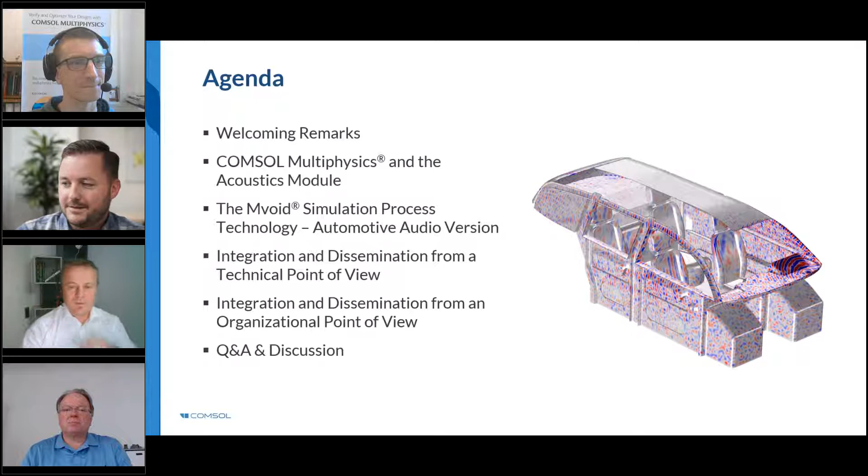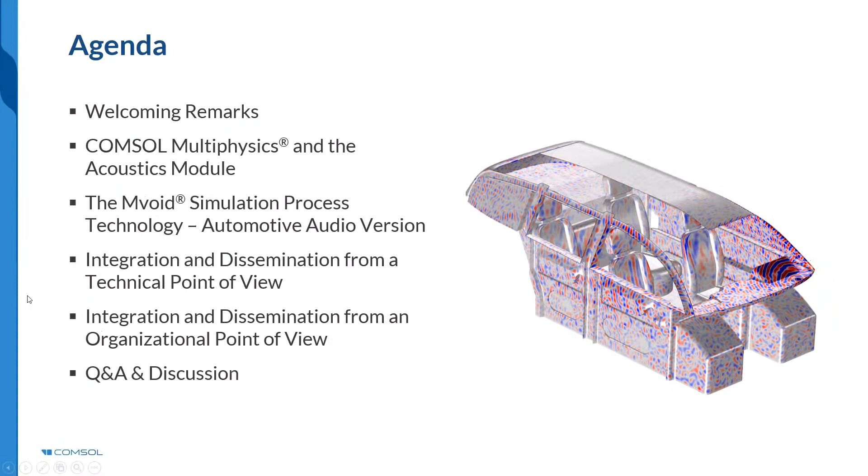All right, having said all that, I will turn off my webcam now. Mads, you should be able to switch the slides now. Let's see. Perfect. Yes, it works. Thank you, Philipp.

I will give just a really quick and brief introduction to the acoustics capabilities in Comsol Multiphysics, with a few slides, and then I will leave most of the time for Alfred and Michael. So I have this single slide about the Acoustics Module, and I like to think of our acoustics products as being multi-purpose, multiphysics, and multi-method. So three times multi.

By multi-purpose, I mean that we have the technologies and the physics, we call them, to model all types of acoustics. So we are not only modeling acoustics inside of a car solving the Helmholtz equation, for example, but we also have formulations of the governing acoustic equations when you have a background flow, when you are modeling acoustics in small devices with thermoviscous acoustics, and so on. So a lot of various implementations of the governing equations for acoustics that have more or less detail depending on the situation. And all that is packaged together, and you can couple many of these formulations together also.

Then, in many cases when you're talking about acoustics, it's also multiphysics. And these capabilities are some of the very strong points of COMSOL, obviously. So we have capabilities for modeling vibroacoustic systems, acoustic-structure interaction. We have capabilities for modeling piezoelectric materials.

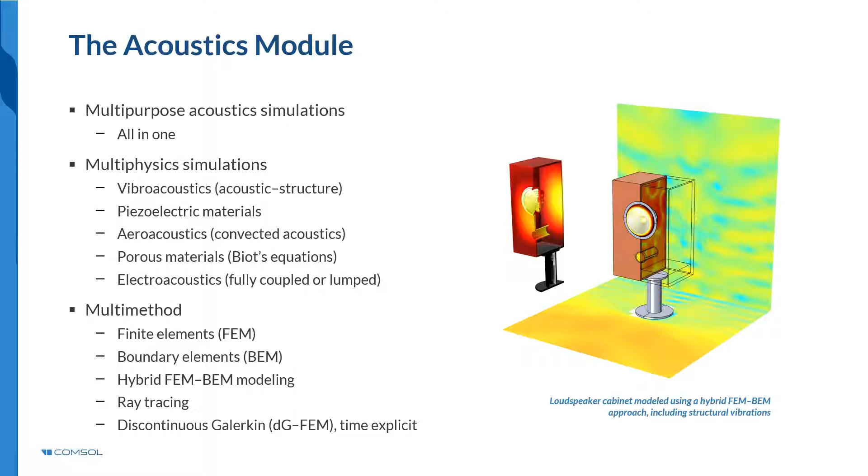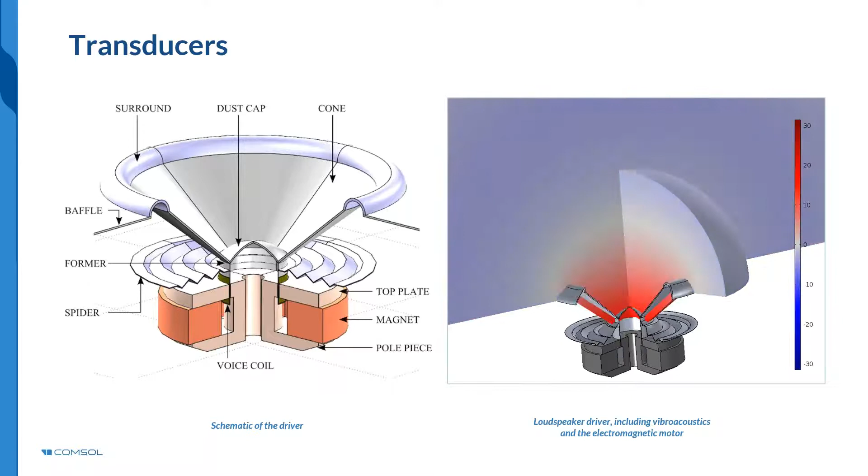Okay, here we go. So I mentioned modeling transducers. Here's one example of a full electrovibroacoustic model of a transducer, a loudspeaker driver, where we are modeling the magnetic system, the pole pieces with some nonlinear iron materials. We have voice coil, cone, dust cap, etc. So that's one thing, when you start looking from the transducer side.

Then, in this case, today we're talking a lot about car cabin audio. How do you want to include your speaker into the cabin of the car as the source? You have two different choices. Let's start at the right, for example. In the lower frequency range, you will typically be doing a full wave method, so could be finite elements.

We can see here we have a mid-range speaker sitting in the door of the cabin. And you can model your cabin in the frequency domain, for example, up to say 2-3 kilohertz. With our latest solvers, you can actually go quite high up in frequency, 5-6 kilohertz, and do the full wave method. But probably for efficiency, you will tend to stop at 3 kilohertz.

In this case, you can model your speaker as a lumped model, or you can integrate the full finite element model of the speaker in the car. You can also model the car door and the coupling between the speaker and the car door. You have volumes inside a car door. You can extend the complexity as much as you want.

Boundaries in the car can be modeled with impedance boundary conditions, or you can model, for example, foams with porous materials. When you move to higher frequencies, you will typically switch to the ray tracing method. In this image, I'm showing a hybrid finite element ray tracing approach where the rays are not released from a point as in classical ray tracing, but from a surface.

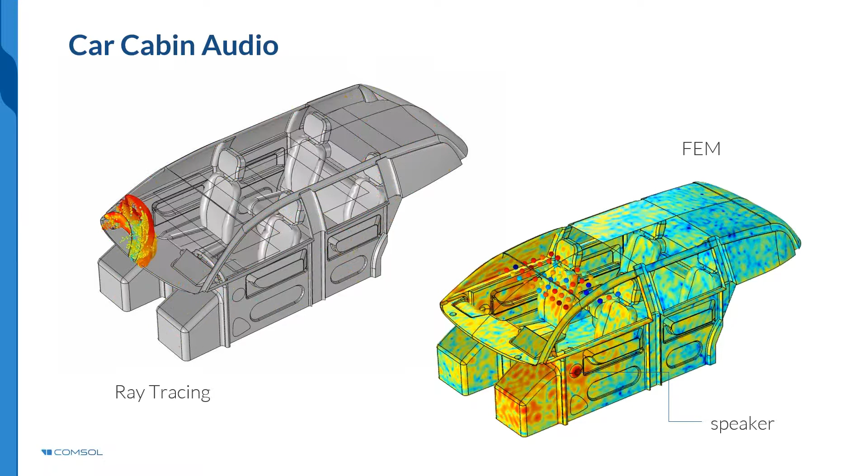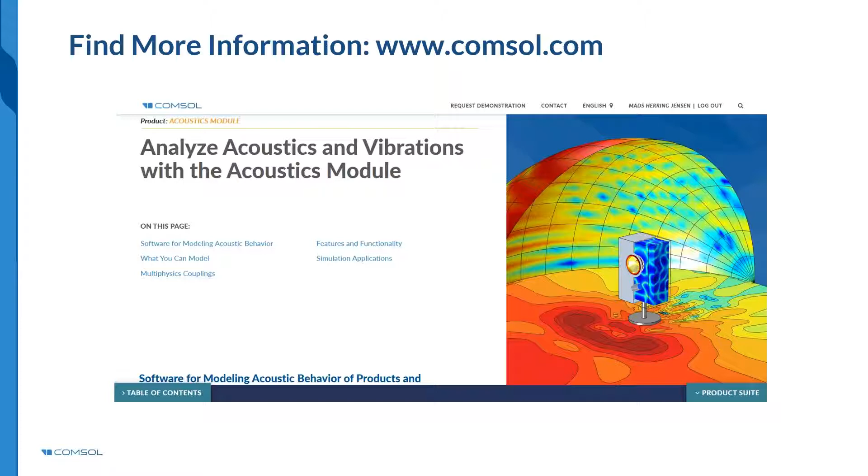So yes, perfect. Good. I would like to lead you through the first part of our presentation, which is structured, as you said already, Philip, in these three topics: the MVOID simulation process technology, talking here about the automotive audio version, and then looking at the integration and the dissemination from a technical point of view, but also from an organizational point of view. So let's start with the MVOID simulation process technology.

Here I would like to start with the use cases and the applications of our customers. Most of them have been already mentioned by you. Beside an outstanding sound experience, considering the entertainment, there are more and more requirements for the automotive audio system in terms of infotainment, talking about a clear car communication. Then the vehicle acoustics from an NVH point of view, simply to improve the ride comfort with ANC, but also, as mentioned, important legal requirements for AVAS, for the warning systems, but also the e-calls.

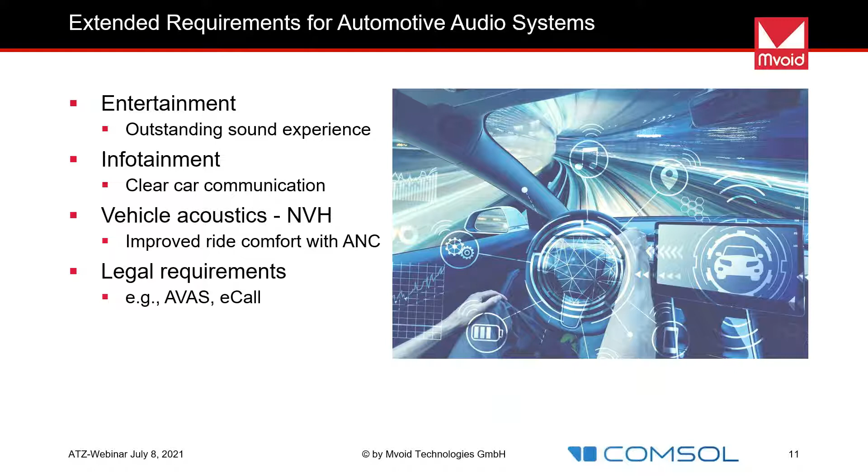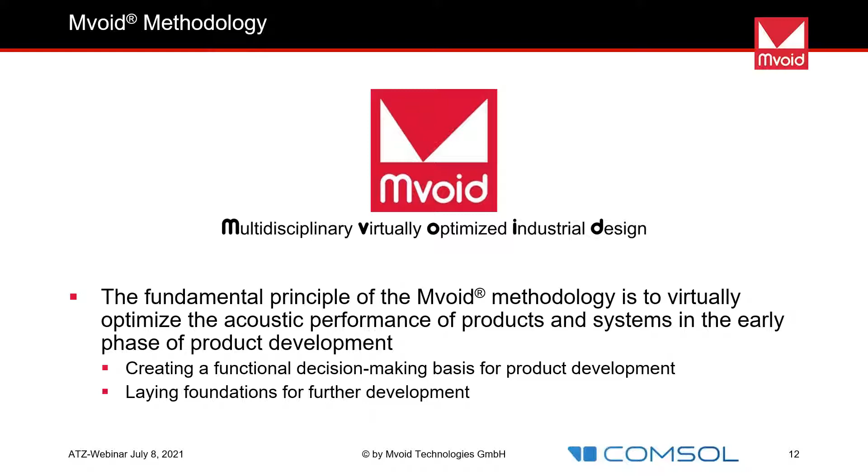So, giving an overview, first of all, what is the MVOID methodology? The fundamental principle of our methodology is to virtually optimize the acoustic performance of products and systems in an early phase of the product development process. So really to create a decision base for product development across the hierarchy at the customer, and to lay the foundations for the further development.

Our simulation environment represents a fully digital development environment for automotive audio systems, but also develops products with acoustical properties in the virtual space by multidisciplinary simulations. Thereby we are integrating engineering disciplines like multiphysical engineering analysis, digital signal processing, sound tuning, psychoacoustics, and the subjective evaluation, which is extremely important, but also binaural audio.

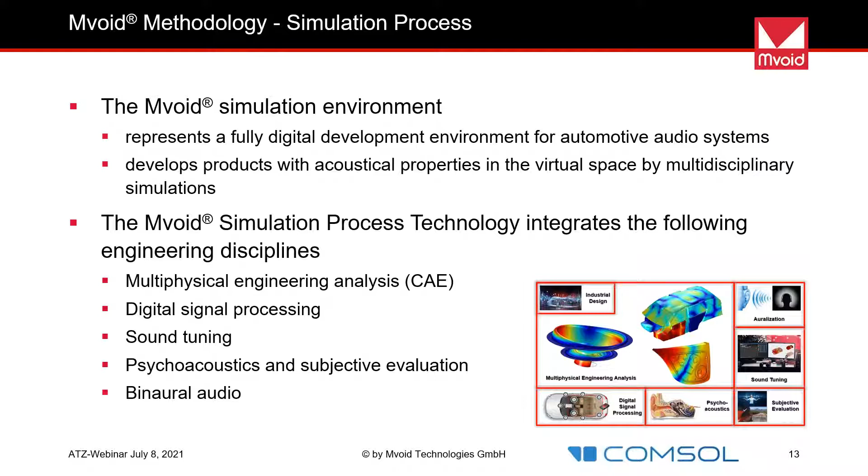On a tier level, in regards to our methodology, we are starting on the component level, talking about the loudspeakers, and ending up on a system level by achieving the digital twin. So starting, as I just said, on a loudspeaker level. Then in the next tier level, we are integrating the enclosure, and then modeling these in the car cabin. This represents the first phase, which is called the virtual prototyping based on a COMSOL model.

After that, we are continuing our methodology with a level 4, the virtual tuning, a level 5, the auralization, and a level 6, the matching between the virtual model, so the digital twin, towards the physical car. And again, this represents the virtual system engineering of our entire process.

So the question is now, how does this fit into the product development process from a customer perspective? Let's assume in this case a really simplified one, because otherwise we could spend hours talking about the product development process and the important milestones. So I tried to simplify this into a concept and pre-development, a design and development, and an SOP. At the beginning, there is a target definition coming from a car line where clear expectations are communicated top down, and the audio engineering team is then defining the architecture based on their experience and assumptions.

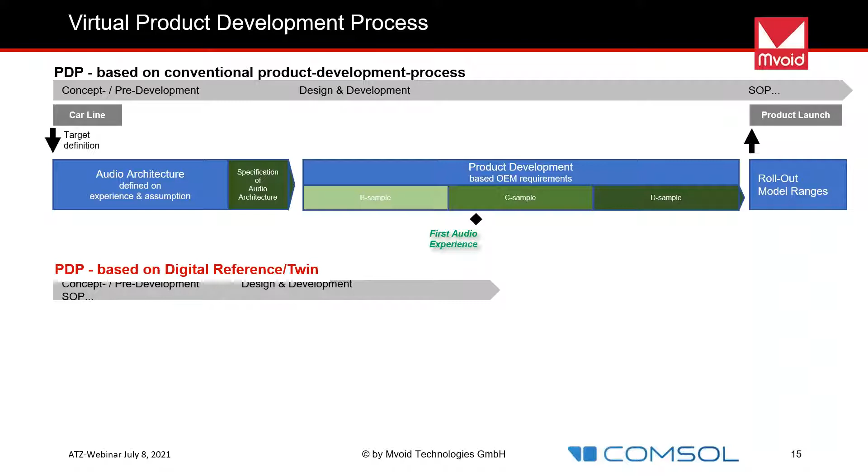Now I would like really to present you the product development process based on the digital reference, the digital twin, again having the same phases. And here we are starting the modeling based on the functional DMU in the early phase, the earlier the better. So within the audio architecture, doing then the virtual tuning, and here creating then the first virtual audio experience, followed by the digital reference. So what does this mean?

And this is for me an extremely important information I would like really to share with you in regards of the time. So here we have the customer feedback that our customer, they need 10 to 15 working days really to create the digital reference. So, and based on this ideal speaker with an ideal environment, so the concept model, this is then the time what we really can ensure, or within that time also the first virtual audio experience.

And furthermore, again, we are enriching the experience and assumptions in an architecture and for the audio team. So really with the simulation and the auralization. So we have really facts, we have data, we can experience how the sound could then really be experienced later on in the car. So, and ideally, this would be then available prior to the concept approval milestone to have, in this case, the most efficient impact on the product development process.

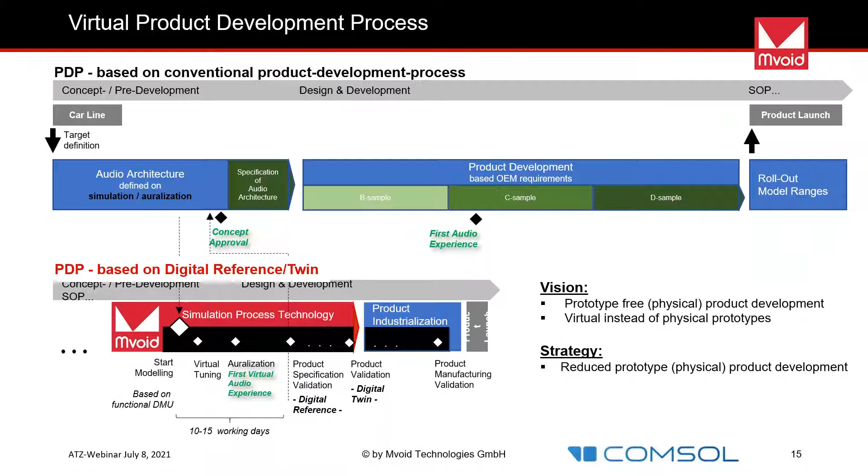So let's talk about the integration of the Mvoid simulation process technology into the OEM product development processes, because this is a must-have to have the most efficient way and also then the involvement of the needed parties. So again, the simplified process, and to really just zoom here into the concept, pre-development, design development, and the SOP.

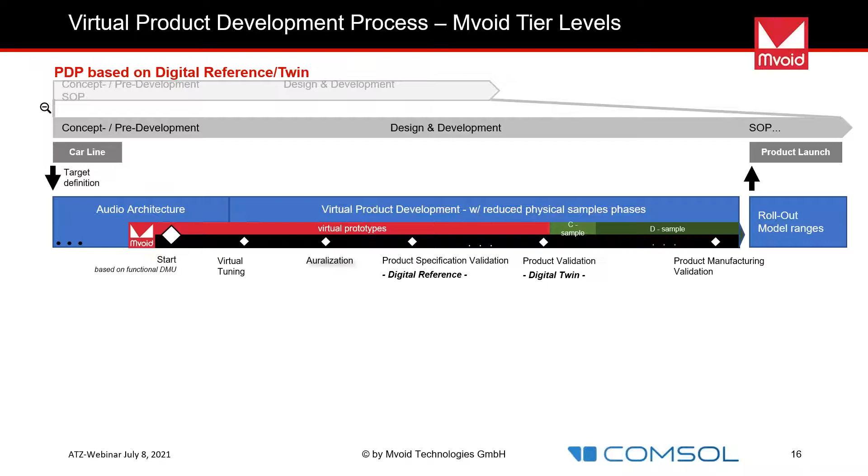So we are starting, or we are adding really our milestones into the existing process by simply the use of existing tools like Comsol, so that the implementation is really on a most lean level. And again, starting with the modeling, going through the virtual tuning, the auralization, the digital reference, and the digital twin.

So before we are going into the reduced C-sample phase, we are also providing then our level 6 in regards of the measurement system, so that a comparison can be realized, and finally the product manufacturing validation can be passed.

So now I would like really to close my loop of the presentation in regards of the MVOID tier levels representing our simulation process technology. And as mentioned already before, we are starting from a component level, going down towards a system level. In this case, we're starting with the tier level 1 of the multi-physical modeling of the loudspeakers, then continuing as presented by adding the enclosure. This can be here, for example, a door module from a tier 1.

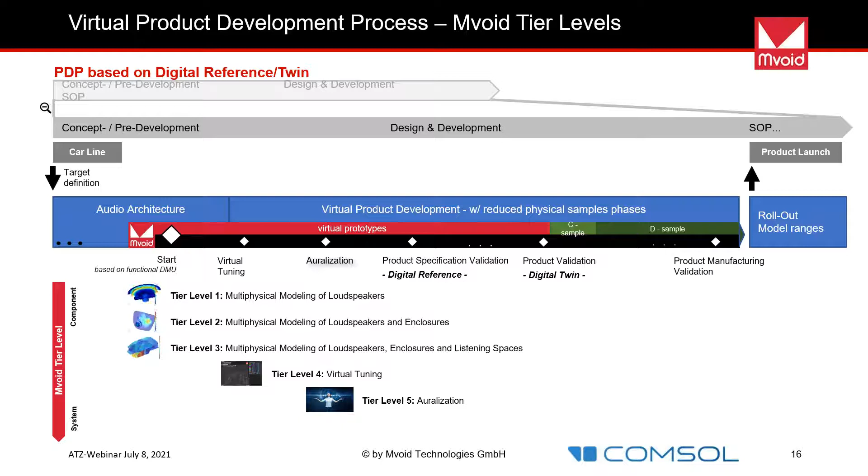And then the tier level 3, where we are including also the listening space. The tier level 3 represents most of the time the level where the OEMs are starting with. And this is not a sequential way to say, okay, you have to go from 1 to 2 to 3. It can be that our customers are finding out issues which need to be solved, so that there could be the need to go back from a level 3 to a level 1 or 2, really fixing the issues, so that at the end of the day the final result can end up in the virtual tuning, can really go through the auralization, so that this experience will then be available.

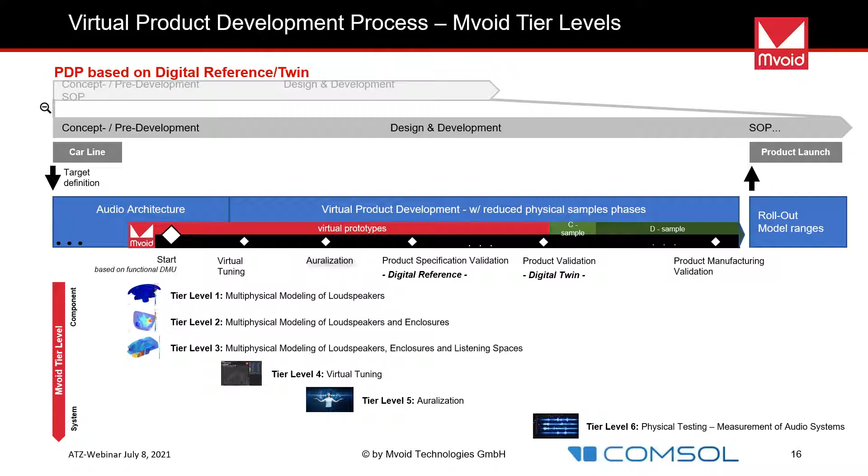And as already mentioned, our tier level 6 represents the physical testing, meaning here we are really comparing the physical car with the virtual digital twin. So our summary is that digitalization of the product development process is not a mega trend. This is really a must-have. In other words, we are really talking here about the digital transformation.

And here we are going through the milestones of the virtual tuning, the virtual auralization, so having really the first experience, the digital reference, ensuring that all requirements will really be part of the specifications, and therefore also have the foundation for the right and the most efficient product development. Then creating really the digital twin as a reference for all the activities right afterwards, and finally really passing the manufacturing validation. And with these milestones, we are providing the benefits of a clear design to target.

And the target, as said before, is not having the best-in-class sound system only. The target is also legal requirements, which need to be considered in future, but also really the performance defined by the engineering. And this is then also based on an increased product and production quality, because from an entire business case perspective, this cannot be ignored in regards of customer satisfaction and really having the best-in-class car audio system on the market. And we are thereby reducing the product development time and optimizing the cost and weight.

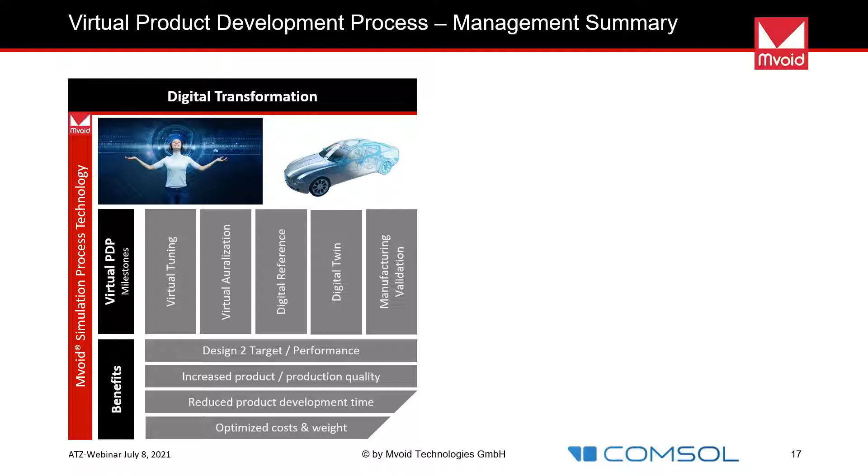So this is only one half of the story. It is also important having really the system responsibility clearly in mind and having the focus on that. So in this case, we are bringing together all departments, so really design, NVH team, simulation, D&E team, manufacturing, so that based on the now available data and the experience through the auralization, they can make the right decision for their changes in their system.

And on the other side, talking really about the suppliers, with more and more suppliers involved in the audio system, it is also important to really bring together the transducer team and the team from the amplifier, where even here different responsibilities are on the OEM side, so that the entire system responsibility for the automotive audio system will then be ensured over a lifetime.

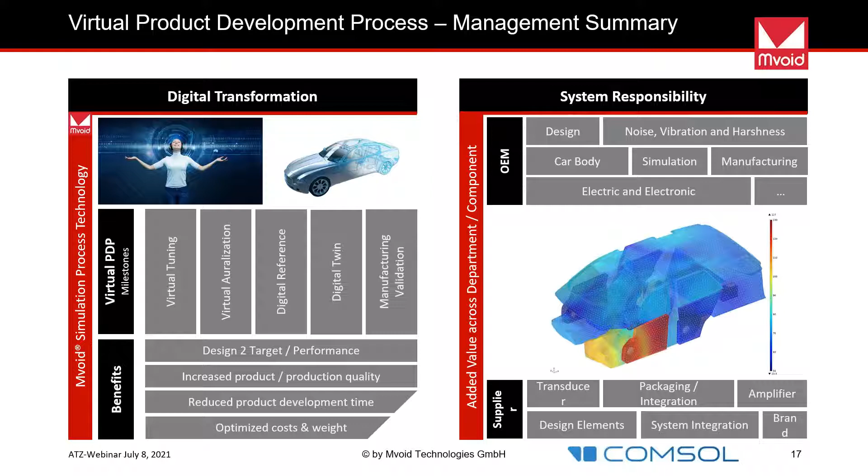So we created a methodology to transfer the first ideas of a pre-development of acoustics and sound design by a multidisciplinary simulation model to the real world. Thereby following really the V model, but in this case, our methodology, the Mvoid methodology, is shortening the time and delivering the benefits I just presented to you.

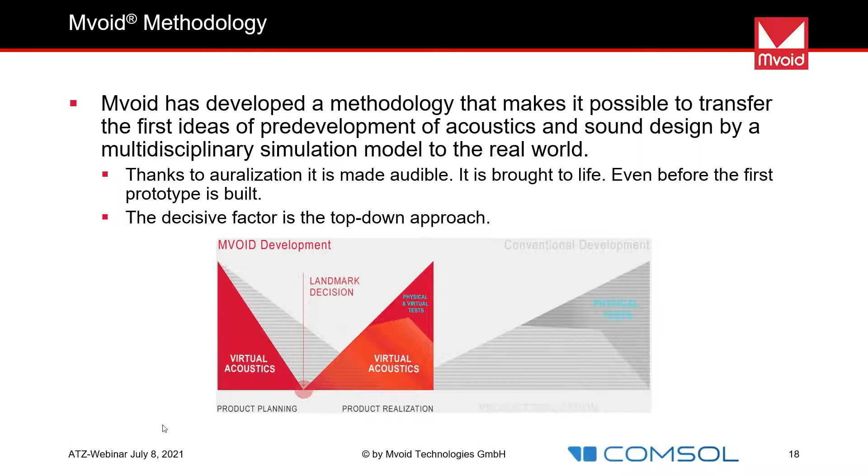Okay, so a few remarks maybe about the things that Michael has been talking about. You have seen, I would say, really kind of a disruptive change in the development of audio systems for automotive applications because of two things. One thing is we're extremely front loading, so we're moving more and more technology into the pre-development and concept phase. And at the same time, clearly, it's a simulation-driven approach.

It's not uncommon to do this in the automotive industry, but it's really quite new for audio systems. And I believe this is simply because the role of audio systems is becoming more and more important, as Michael pointed out. So I will not focus here so much on simulation technology, because I think it's there. It's available. We have really mature tools.

I'm working on automotive audio since 2006 and on multi-physics simulation since the early 90s. In the 90s, it was really research and thinking about maturity of available software technology and simulation tools. That's not the point anymore today. The tools are here, and I think Mats has given you a good introduction of what is really possible. The challenge is really what to do with this in a large organization.

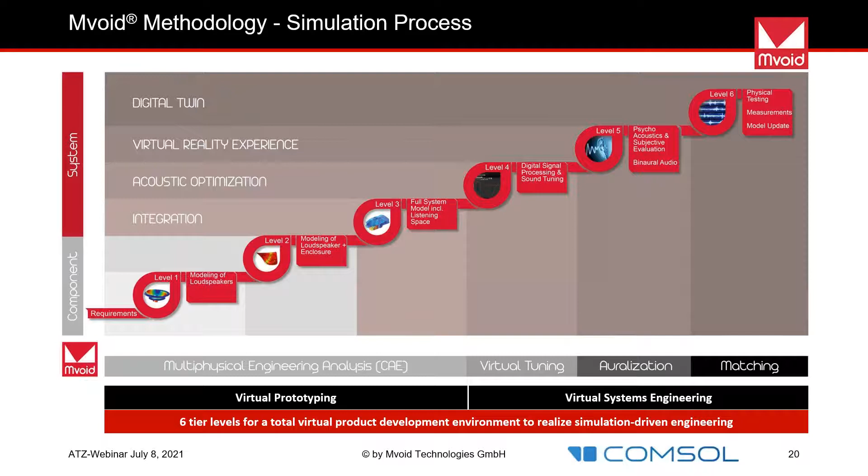So that is why I'm talking about front loading. I mean, really do the things in the early phase. So what does that mean for the software? Well, first off, I'm gonna start with tier level 1 here, the loudspeaker, the transducer.

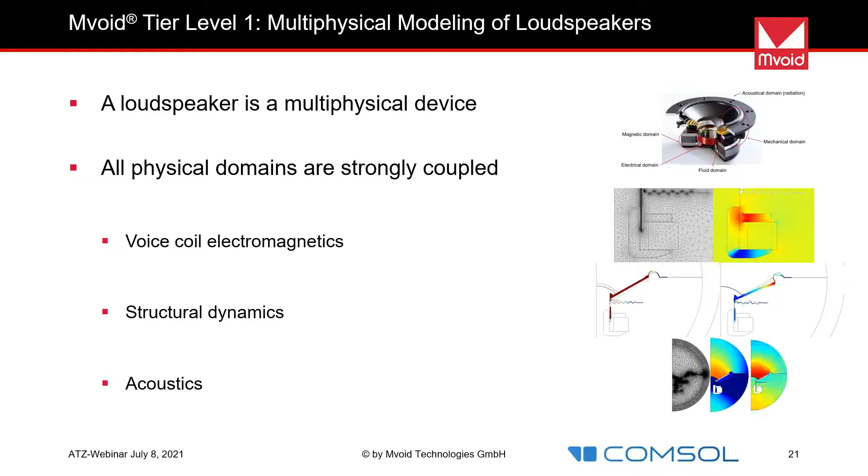Looking at it, it's a multi-physical device. Everything is strongly coupled. We have electromagnetics and structural dynamics. The membrane is actually moving the air. That is what we're listening to then. And then we have the acoustics that really propagates the sound waves.

So what does that mean to the simulation tools? Well, it depends what your role is. For the supplier of the transducer, it might be a little bit different than for the OEM. For one reason, and that is because the supplier has to really work on the design and ultimately optimize the design of all the components and subcomponents of a loudspeaker.

Not so much for the OEM. He would simply source the speaker, but his responsibility then is really the integration, and that makes it a little bit challenging, as we will see later, in terms of the mechanical and acoustical integration.

So there are different requirements, so that the supplier might need more details, and he really has to model especially the electromagnetics on a very detailed level so that he can optimize it, especially because if we look at the cost structure of a loudspeaker, 80% might come from the motor system where we have the electromagnetics.

So this is one aspect that you need to understand, and then also later I'll talk a few words about the interaction between the supplier and the OEM, which might also have an impact on this here.

The other thing is we have two approaches in multiphysics. One approach is like COMSOL does it, to use an all-in-one solution. So that means all physics is there. And I think this is one of the reasons why you can really treat COMSOL as an industry standard tool for loudspeaker development, because as a loudspeaker developer, you need to look at the electromagnetics.

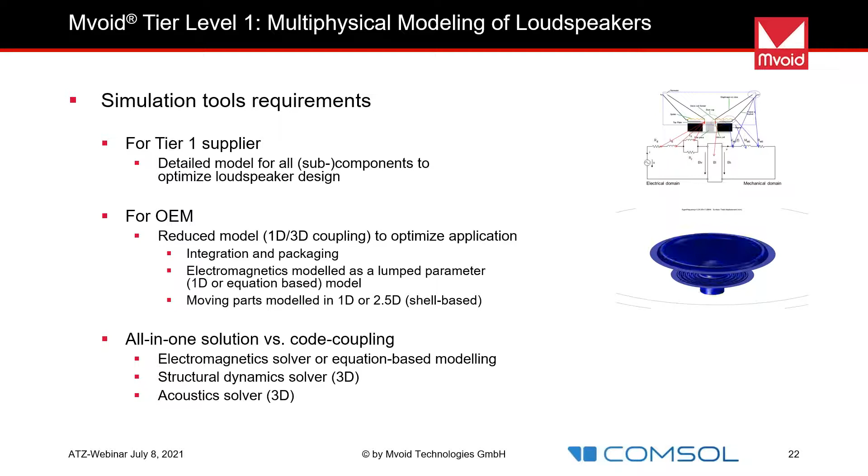And then you also need to have a compatible revision of all the different tools that you're using here. More or less the same thing applies if we step up to level 2, looking at the integration of the loudspeaker. That has a strong impact, of course, on the vibrations of the membrane and the sound radiation. In automotive, we have some really specific challenges.

Extremely complex geometry of enclosures. As I mentioned, we use a door as an enclosure, which is not ideal, of course, because it's quite shallow and it's soft also, so it vibrates as well and might really destroy the performance here.

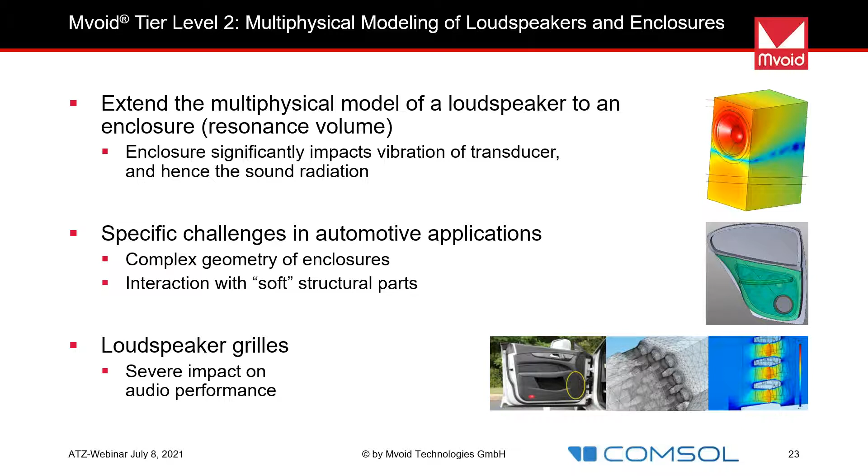And interior design always would like to hide loudspeakers, so that means we're using loudspeaker grills to make them invisible, and that also has a severe impact on the audio performance. And that's a different story now here in terms of physics, because we're coupling different domains here.

We will end up in a multi-scale problem, because on one side, talking about the motor structure, we have very, very thin geometries between the voice coil and the magnet of maybe 0.5 millimeters or so, and then we have a door of 1 meter, or even the whole cabin. Later on, it is a couple of meters, and here it's really a challenge.

But it's the same situation here for the tier 1 supplier and the OEM. They have to use reduced models, reduced in terms of the level of detail, because otherwise you would really have an explosion in the capacity of the computer that you would use here. So here they are more or less on the same thing.

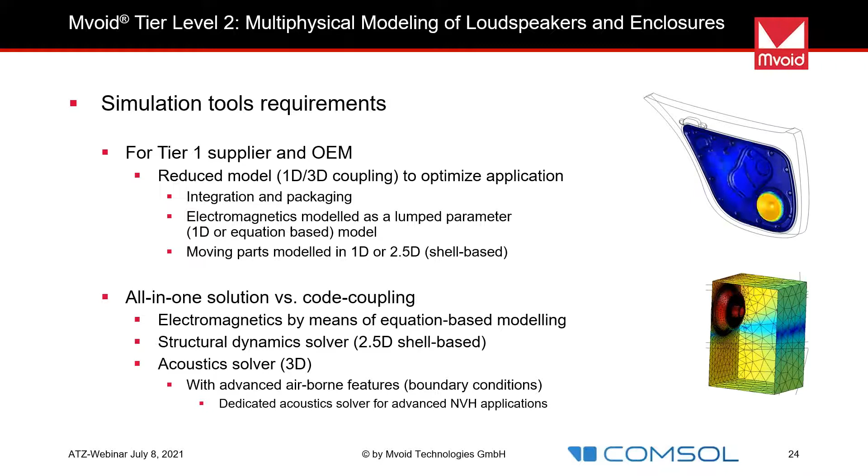It's a crossover thing. Who is doing what? The OEM has the advantage that he has access to all the information regarding the car, and that might be a challenge, of course, for the supplier then really working on it. Same thing again here.

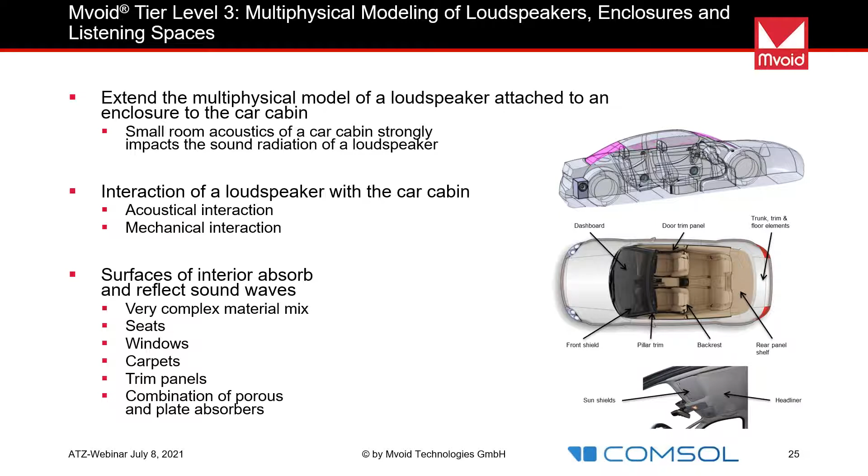If we step up to level 3 now, looking into the cabin radiation, it's simply even more complex. We have a more complex material mix with the interior acoustics and simply more components, so we really need to look at the acoustical and the mechanical interaction that we have in that domain. Same thing, I would say, here really for the supplier and the OEM.

What is really important here is to look at the role of NVH. There is a long tradition, of course, in the automotive industry to do acoustic simulations. So there are models already existing, and they might be reusable for audio simulations, because they model and simulate the cabin space, but not the loudspeaker.

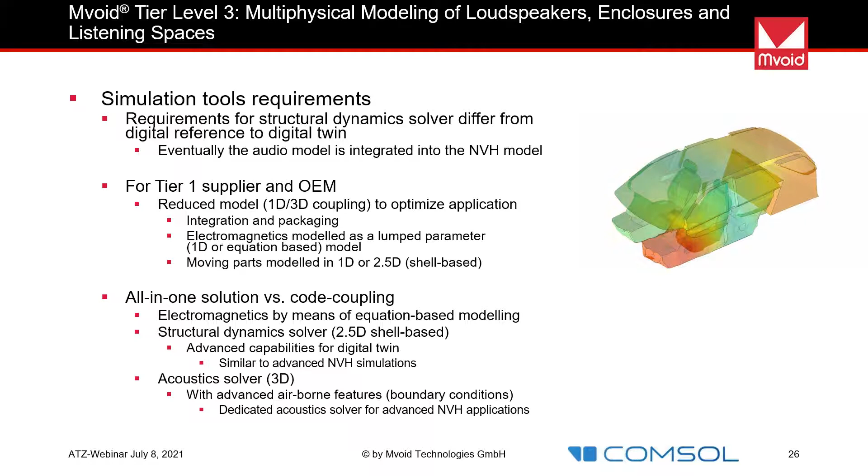So in that case, it might be really interesting to use these NVH models and integrate the loudspeaker into the NVH model. And we really need to do a lot in terms of 1D-3D coupling to bring in the electromagnetic equations. And that's a huge advantage because you can easily use this equation-based modeling in combination with very complex whole vehicle models.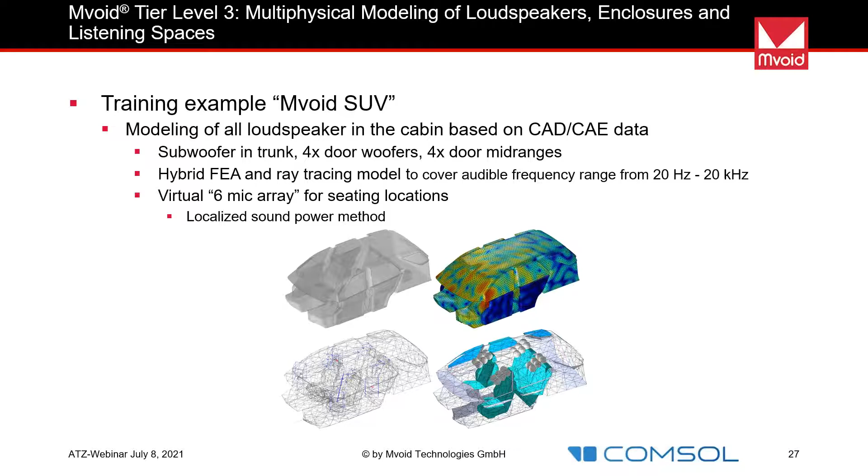So the typical approach in NVH using finite elements and the statistical energy analysis method for higher frequencies doesn't work here, because we want to listen to the system, and the SEA does a spatial average, so we miss the phase information and we have no chance of listening to it. That really makes it unique in terms of audio simulations to use ray tracing so that we can really listen to the system.

These examples here look fairly simple. It's one of our training examples. Unfortunately, we cannot show any real-life customer applications here. But if you want to listen to it, it also means you need to apply signal processing and tune the system.

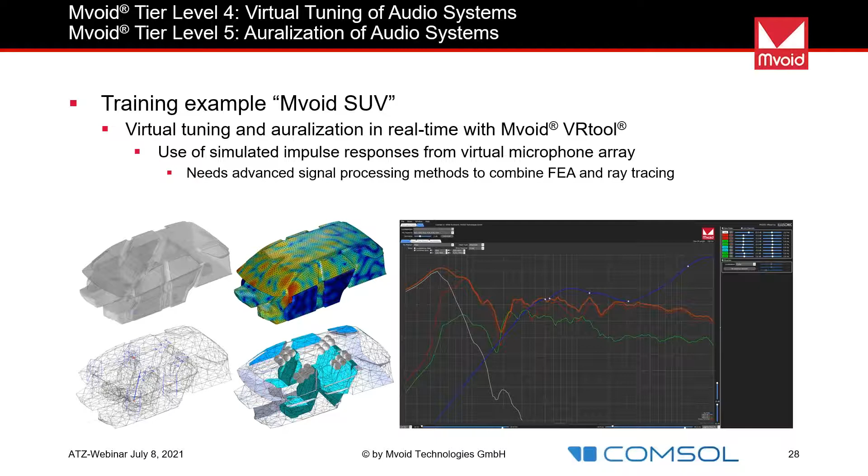We have constraints in the location of loudspeakers, which means different arrival times of sound waves. Distance also means different levels, and we need to apply EQs, especially at lower frequencies, to account for modal effects where we have resonances, where we can have peaks and notches in the frequency response, and finally we can listen to it.

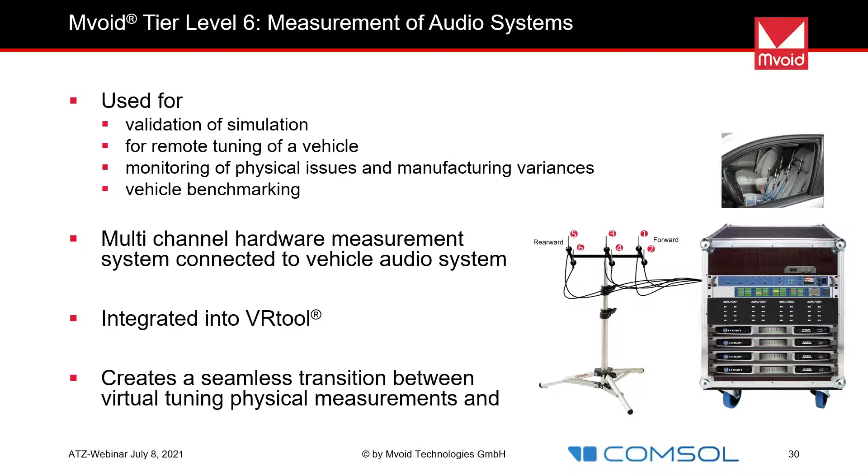So that is really important, that we can listen to the concept in the early phase already to say, is it a good concept or a bad concept? And of course, we need a measurement system, even if we're all talking about, in the extreme case, physical prototype-free development. It actually means we want to push back many of the early prototypes because they're not really relevant in terms of the acoustic performance. And then ultimately, in more or less the same step, we'd like to validate the design and the simulation.

So from an organizational point of view, what does it mean? Michael talked about the digital reference. It's great that we can assess the performance of the concept by listening tests in such an early phase. But the organization needs to be ready for that, because we might then figure out, hey, we have an issue here, we need to make some changes. But what I see really often is, if you're not prepared for it, there is no room, there's no time left over to do any changes.

And going further in the development and really adding details for the digital twin, the really interesting thing is that we can look at the degradation that we have because of all the design constraints. The digital reference is an ideal situation where we say, well, that would be the best thing that we can achieve with this number of loudspeakers, this type of loudspeakers.

But then, of course, you have not only design constraints, but also cost constraints. And that's also a thing that the organization needs to be prepared for, because now you can really have constant reviews of the performance degradation and say, hey, hold on, that really doesn't match with the performance targets that we are looking at.

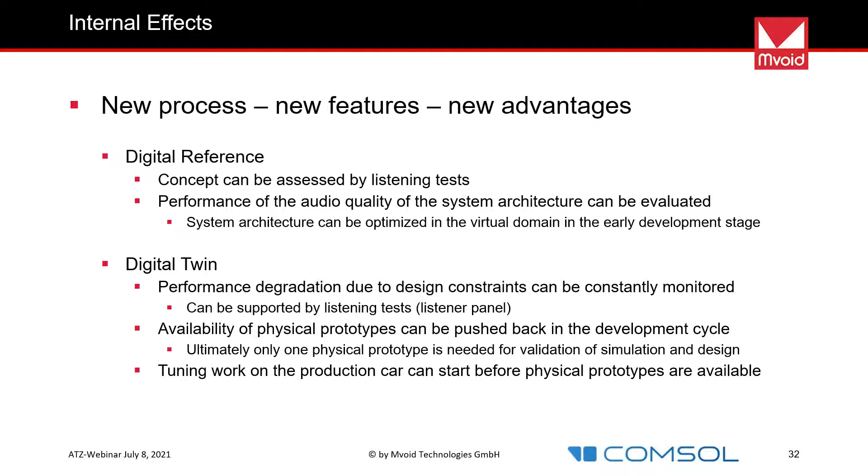Well, external effects here on the supplier side, what does that mean? Well, you have the chance, if you push your supplier to work on innovations and maybe also disruptive technologies, to really assess them virtually in the application. But then you need to be aware, it's a very early design phase. And do you really want to involve your supplier here? What does that mean in terms of IP and compliance? This is simply new. Usually you wouldn't do this.

So you would really see your supplier in a new role as a provider of technology and as a technology partner. So that is also something very, very interesting. That role, I think, needs to be changed if we want to have even more benefits out of this digitalization approach. And as I mentioned, suppliers, and we see this in a couple of other applications in the automotive industry, shall deliver virtual prototypes as early as possible, so that you can really assess them in the application.

And that also means that once you do the tuning work, I'm not so sure about the C sample phase, because acoustically most of the parts might not be ready in such prototypes, but in the D sample phase, you can actually start with the tuning work earlier and with the ultimate assessment of the quality. But that is also something you need to account for in the organization, if it's doable. And then you need to define the steps and really involve the people at the right time.

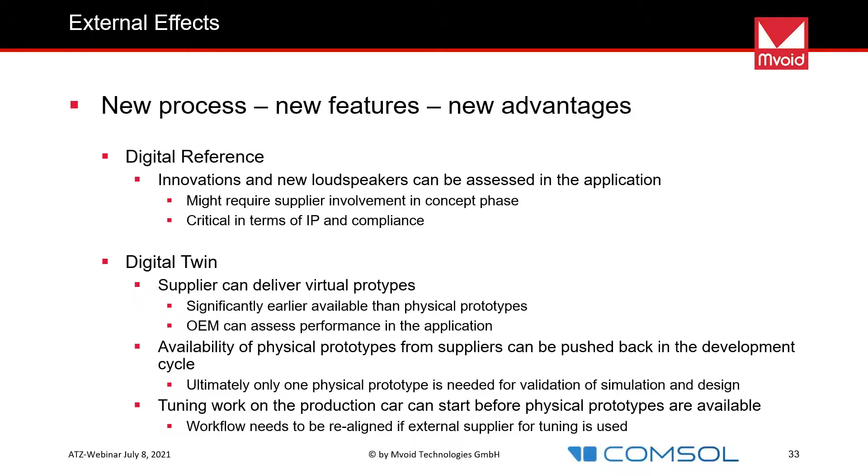And that's most of the work, I would say, that we're doing at the moment. Not so much looking at the physics, but really looking at the organizational aspects of introducing this new technology. That's it from Michael's and my side here, on what we do at the moment within the automotive industry, with focus on acoustics and audio.

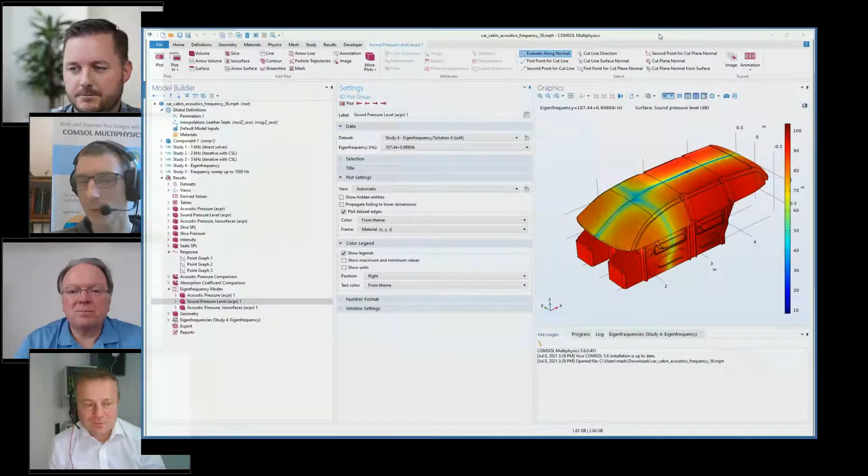Well, yes, it's possible. I think, Alfred, you would agree also. I think a good place to start could be, yeah, I'm just sharing my screen. I'll just show we have a little tutorial, which you can find on our homepage. It's called Car Cabin Acoustics. You search in the search field up here.

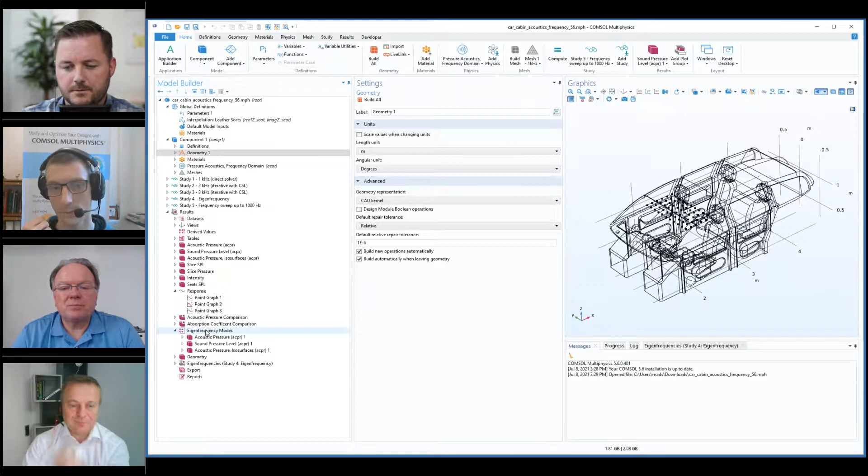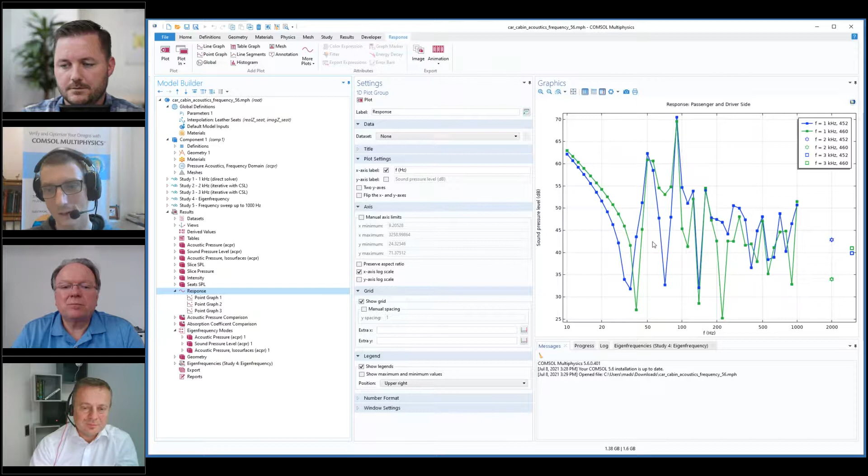It's a model of a car cabin, very simple generic geometry, and in this model there's both a frequency response done up to 1 kilohertz, but we also do a modal analysis. So you can look at the sound pressure level distribution, the sound pressure level at the seats for various frequencies, look at the response in an array of microphones. So I think this is probably the first place to start, especially for low frequency issues. So correct me if I'm wrong, Alfred.

One good thing is to visualize the sound field, to understand at the lower frequencies where we have the notches, how the first mode is building up, where the notch in the sound field is, how it is moving through the car at the very low frequencies. So that can all be done.

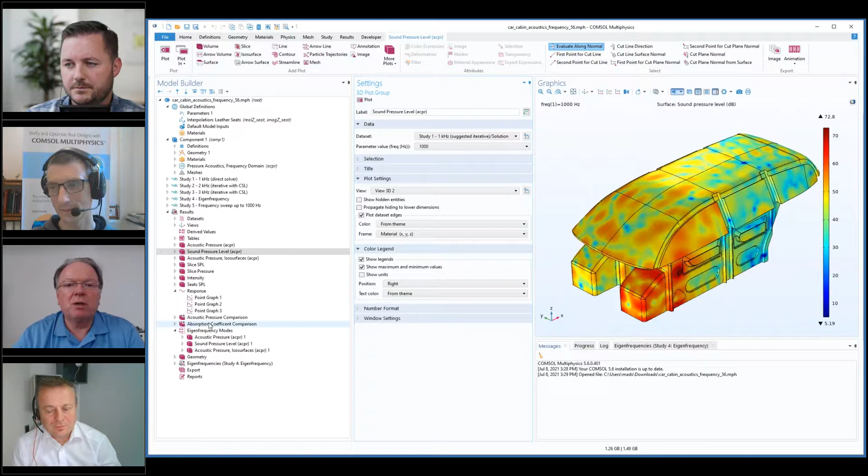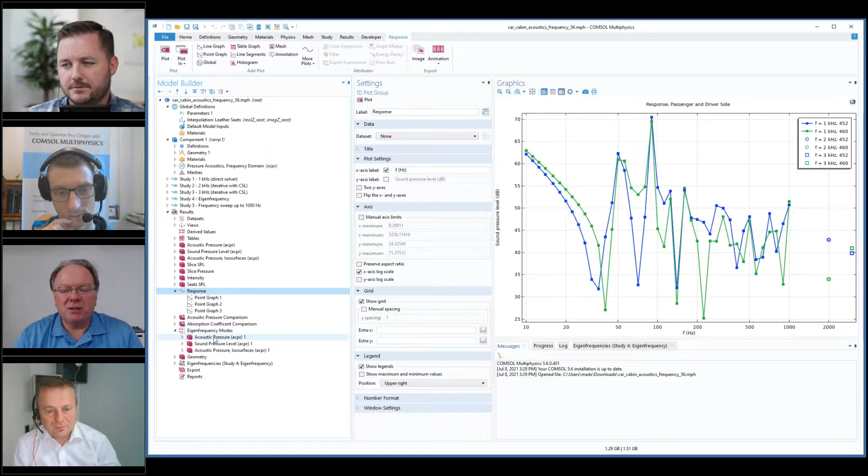And maybe just a quick remark here. The question might also go in another direction in terms of active noise control. Yes. And that's another challenge here, I would say. That's even more complex. What we do here is we use Comsol results and then generate the summation and really try to control the sound field at low frequencies. And that is, I would say, a very, very important application nowadays.

Not so much entertainment. It is quite natural to use loudspeakers as an entertainment system, but really focusing on the ride comfort and trying to compensate noise by means of active noise control. All right. Yeah, thanks.

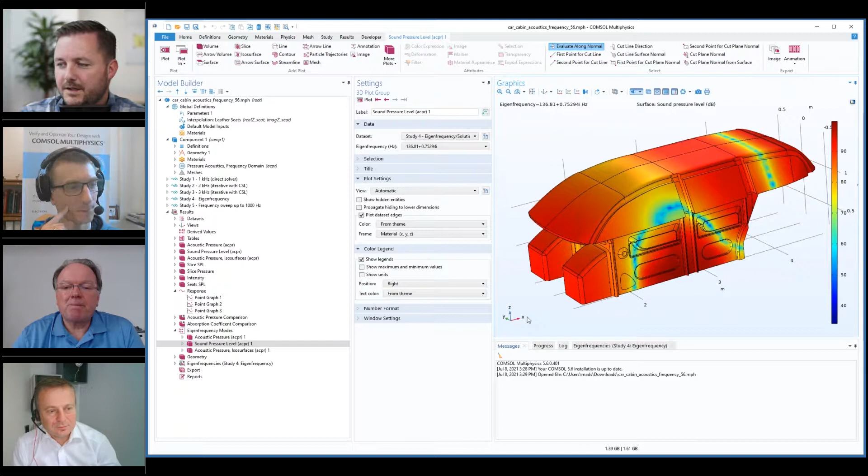And then there's, I like that comment: auralization is in practice the proof that simulation works. Could you explain in more detail how auralization is validated and how does it work? Yeah, well, that's actually straightforward to do the validation. Usually we do this with every customer. Most of our customers are always curious about the whole audio system. And when we talk about the whole audio system, it is auralization, because simply showing you lots of curves doesn't help you. That doesn't really make sense here.

But the ultimate validation is really sitting in the car. We are modeling an existing car in that case as a validation project. Listen with your headphones and then take off the headphones and listen to the real car. So we do a direct A/B comparison in the car. And yes, it works. It's of course more challenging with the concept model because we describe an ideal situation, but I think it's also important that you trust the technology.

So that is why we always start with that, not with all customers. Recently we've seen also customers that directly go to the application because they say, well, you guys, we know that's all working, we don't need the validation of your technology. And they directly start with a digital reference of a car line that is newly developed, which is a real challenge at the moment because the whole structure of a car is changing because of electrification, and you might not have the typical places for your loudspeakers, and then you end up in a totally different result.